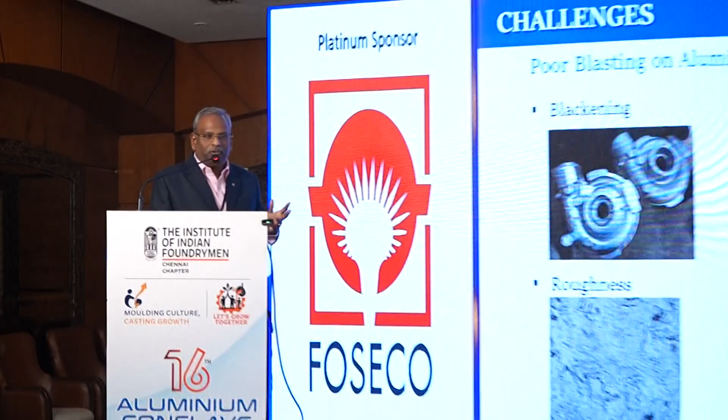So these are all the challenges you will always be seeing in aluminum die casting due to poor blasting: blackening of the component, staining, shots embedded on the component, and roughness. This is what you will always have a problem with at the end of the month before dispatch. So we will be giving you a proper solution for it. That means we need to have a proper surface preparation.

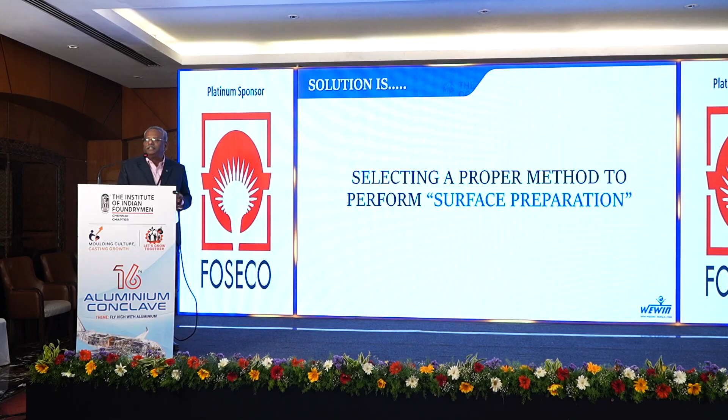See, the topic was given as tradition and innovation. These are a few key points I want to tell you, and it is not a big elaborated subject of shot blasting, which everybody knows. But whenever you need to go for any shot blasting requirement, at least you have to understand what you want from the supplier and what procedure is required, for which these small inputs are for you.

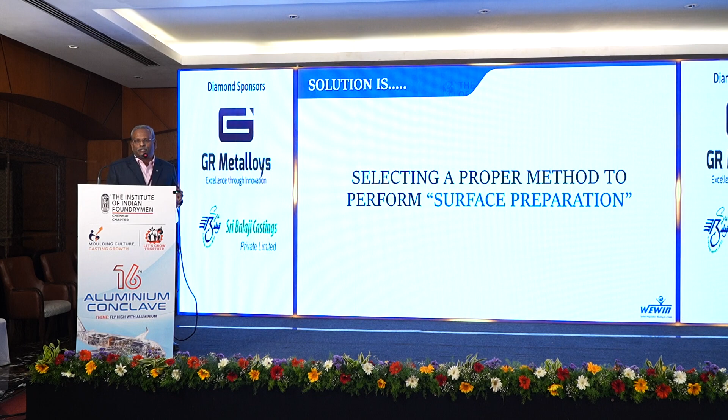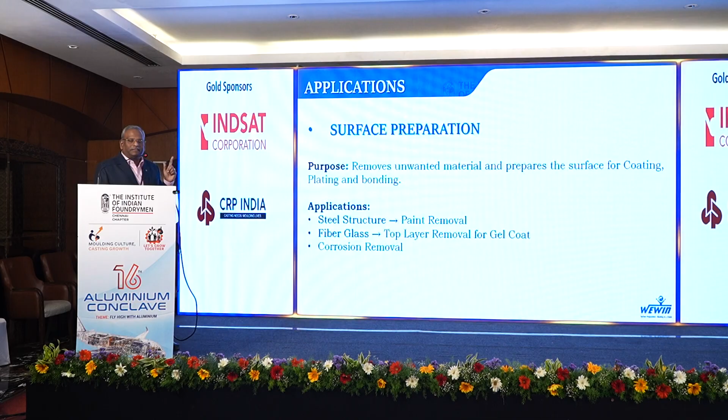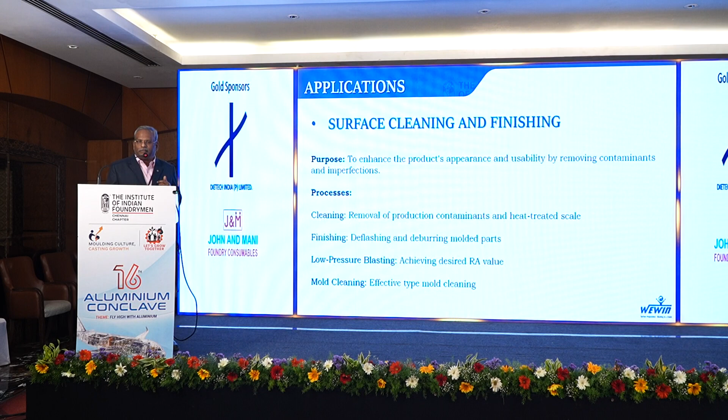Always look at what application you are looking for. In shot blasting there will always be three applications: one is surface preparation, second is surface cleaning and finishing, and the third one is shot peening. Surface preparation is nothing but preparing the component before coating or painting. And surface finishing is exactly what is required for aluminum die casting, because after blasting, the component goes for machining or other operations, for which we need to prepare the casting properly.

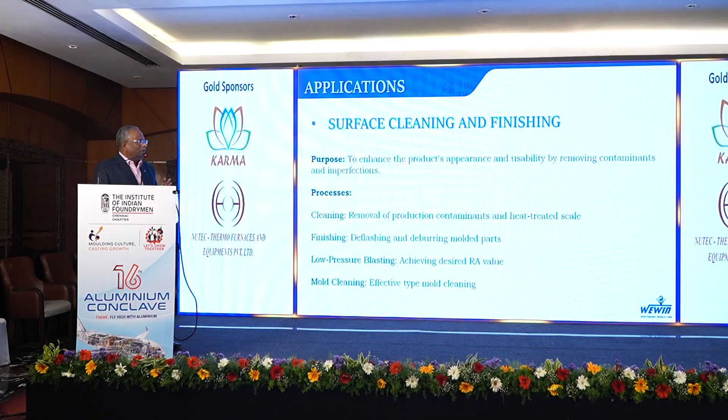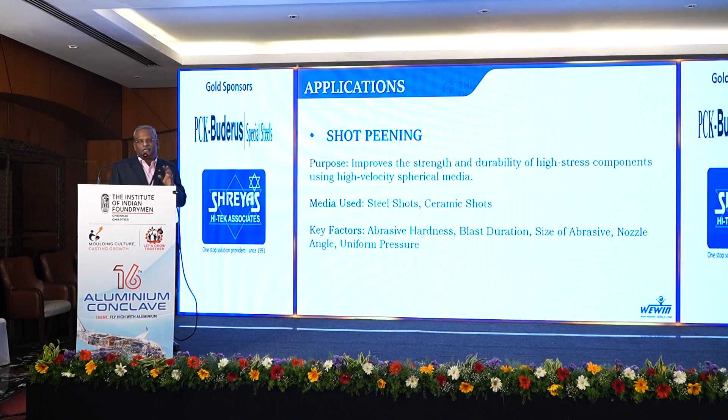So you need to tell the people that you want the machine for surface finishing and cleaning. And the third one is shot peening, which may not be required right now in aluminum die castings. For other parts where cyclic stresses are there, we need to go for shot peening. That is another process. These three are always there for shot blasting.

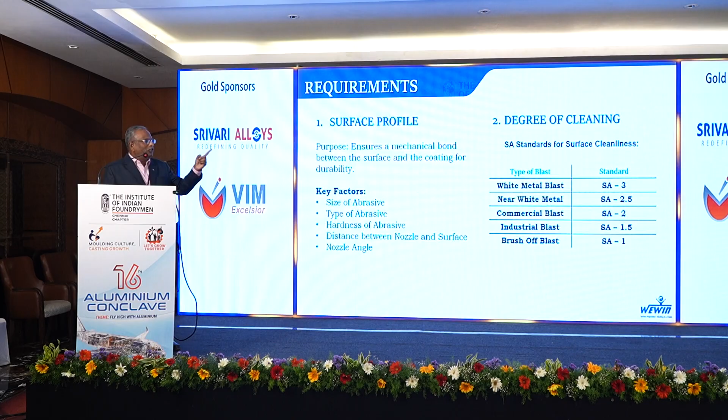Now I have told you what application is required. Second is what your requirement is. Whenever you are asking any shot blasting manufacturer, sir, I am having this casting, I want two things: one is surface profile, another one is degree of cleanliness. Please, I am requesting everybody to give this information so that they will give the right machinery to you and the right shots can be recommended.

Surface profiles will always be in microns. The Ra value or Rz value, what micron you require on the component, that you need to specify. Based on that, the machinery can be manufactured by the people. Second, it's a finish, a visual finish. You want to have roughness or you want less roughness, everything.

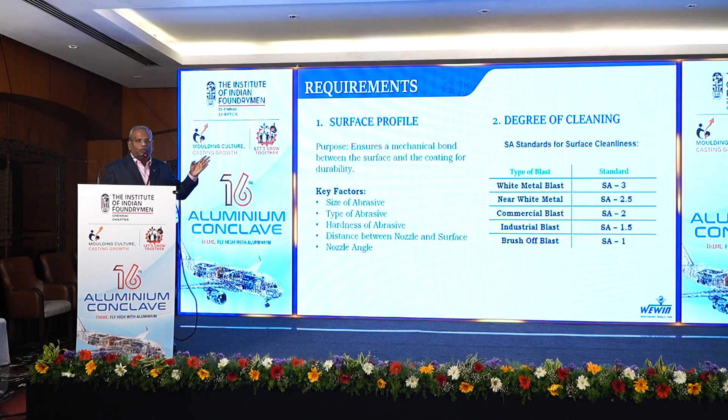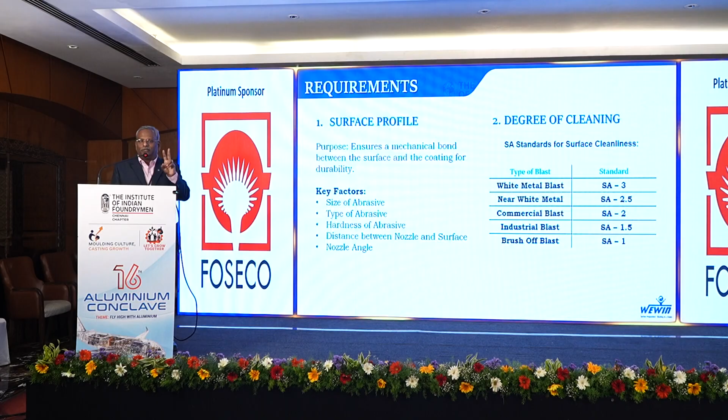So, Prem, I need to have a blasting machine to blast our engine blocks, which requires this much micron roughness, and it should have this much cleanliness. Always you need to mention the two things: what the application is and what the requirement is. These two are always deliverables for any of the equipment manufacturers. This I wanted to highlight to you.

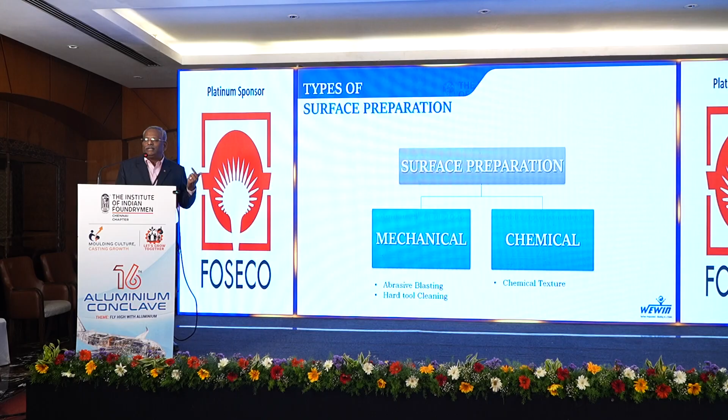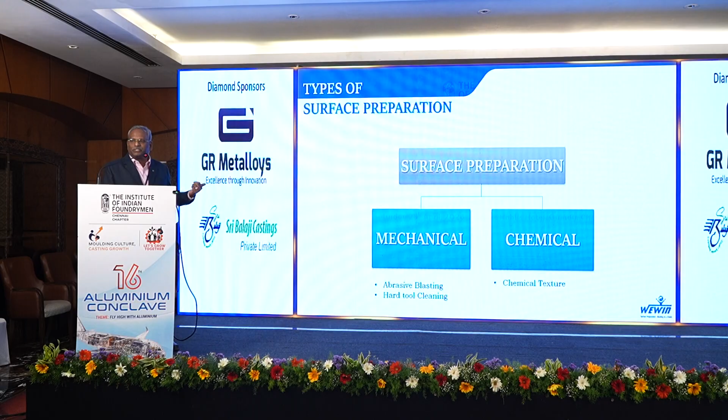Just we are going to the basics, fundamentals. Surface preparation will be of two types, mechanical and chemical. All the people know that after aluminum die casting, people will go for chromatizing, anodizing, everything. That is a chemical process. We will go for the mechanical process, which is abrasive blasting. I will focus on mechanical blasting right now. You can see how many mechanical blastings are available: water jet blasting, ice blasting, laser blasting.

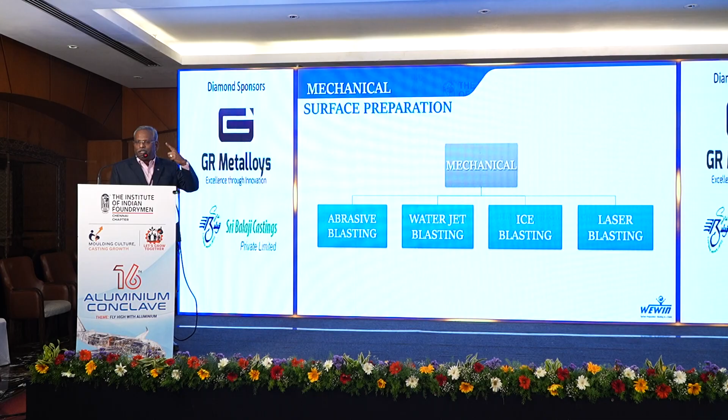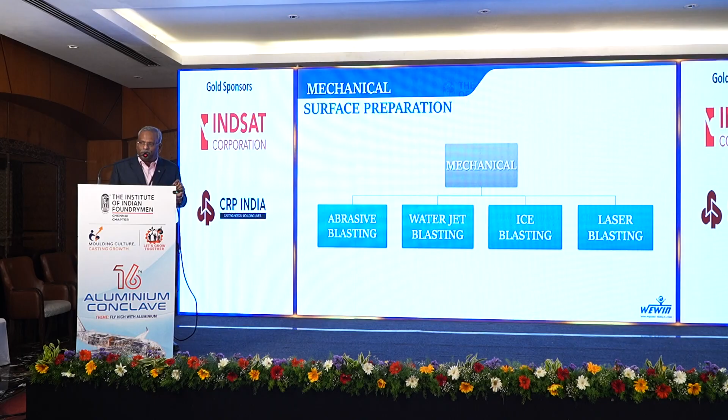Now we need to start from 1880 to 2026, the travel of shot blasting. It started from abrasive blasting. So many managing directors right now are talking about sand blasting, sand blasting. Please prohibit the word sand blasting. It is abrasive blasting. Sand is the most prohibited process in the world. So it's abrasive blasting. Now we have gone on with other advantages.

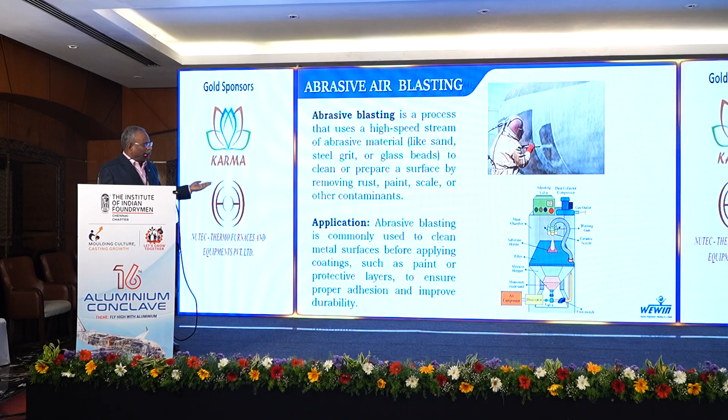Just for the pictorial view, I am giving you information about abrasive blasting. It's like compressed air blasting, which you people always have in mind from college days as sand blasting. The abrasive is mixed with air pressure and blasted, for which you can use sand, steel grit, glass bead, anything, through which you will get proper surface preparation.

Then it goes to wheel blasting. Compressed air blasting is called air blasting. Wheel blasting is called automated blasting. Most of our aluminum die casting people will have automated shot blasting, which is a wheel type shot blasting machine. You can see there will be a turbine propelling the shots at different speeds. We will be cleaning with that.

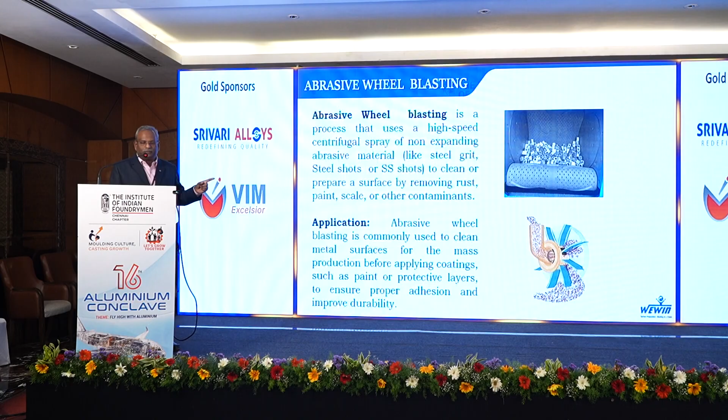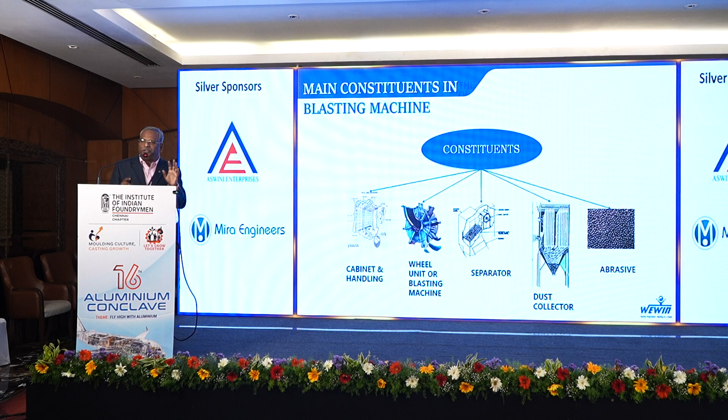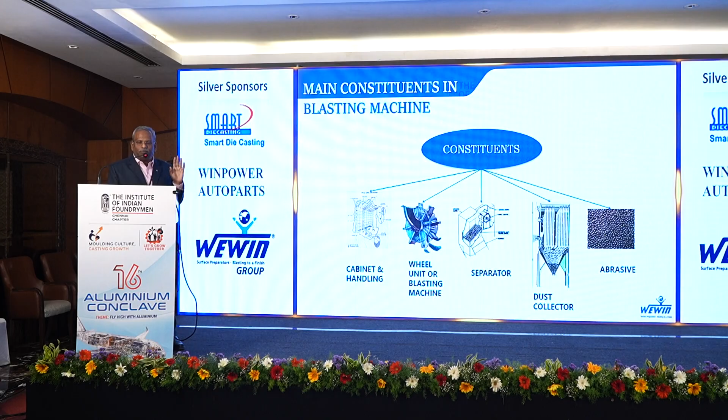Now these two small slides can be understood even at CEO level or the lower level. People can understand about the shot blasting machine. If you give 20 marks for each, it will become 100%. Whenever you are walking through your shop, if you see that anything is not working, that means your system is not working properly. Now these 5 systems I will correlate with our human body. Next slide.

I think now you can understand easily. This is not only our shot blasting; any shot blasting in the world, you can understand this. Always you can see the body. Every maintenance person, when there is a problem in the machine, will be doing all the patch-up work. That is called body and handling. And every maintenance person understands wheel unit maintenance.

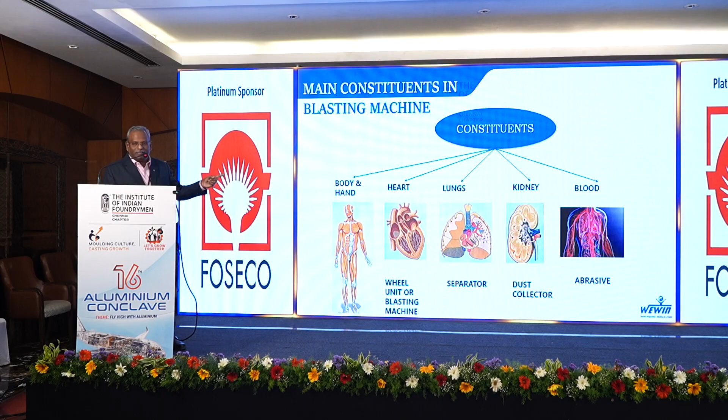Lungs is the separation system. Kidney is the dust collector. Abrasive is the blood. You know one thing, we don't know whether the kidney is working or not, but when we have chest pain, immediately we attend. That's how all companies replace the blade, impeller, control cage immediately. When we have scratches on our hand, immediately we put a band-aid. We maintain it. Whereas nobody knows whether the kidney is working or not.

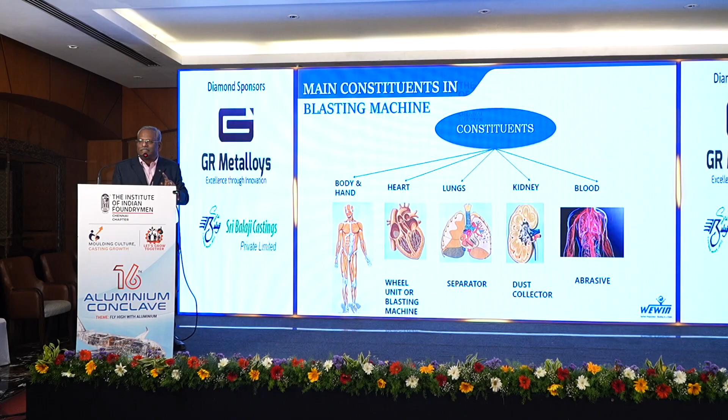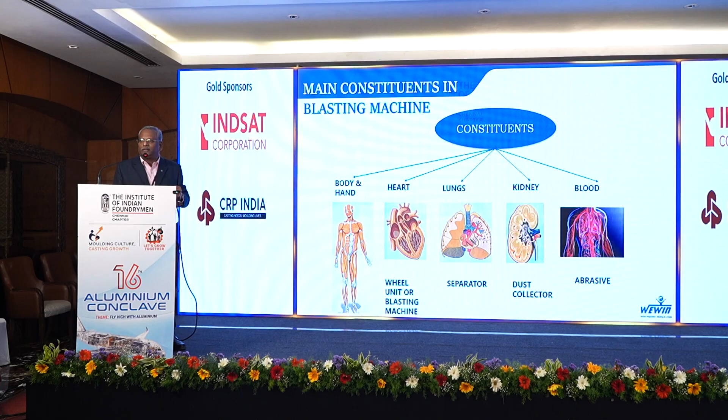That's how most machine failures take place in the kidney, the dust collection system. This is always outside the plant and nobody sees how it is working, whether it is sucking properly or not. Why? Because we are not running the machine. It is given to the subcontractor. This is where the failure takes place. So it's a small idea, you can correlate.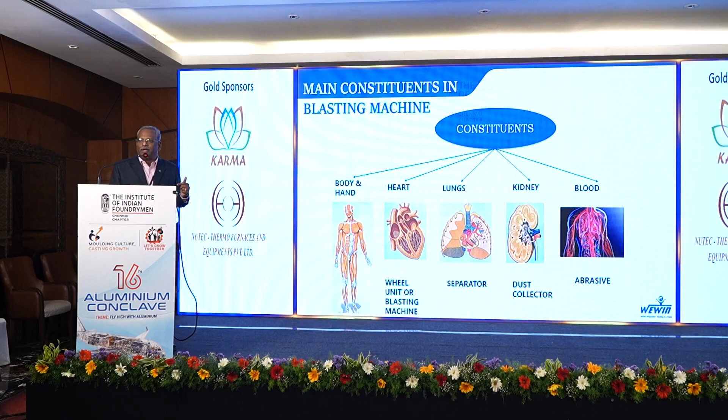If you are not using a proper abrasive, definitely there will be a failure in your product. If you are using grit, it will affect the surface roughness. If you are using any other abrasive, the cleaning will never be there. So the blood of the machine is abrasive. Go back and check in your machine which size of abrasive you are using for which product, what surface roughness is asked by the people, and what we are using.

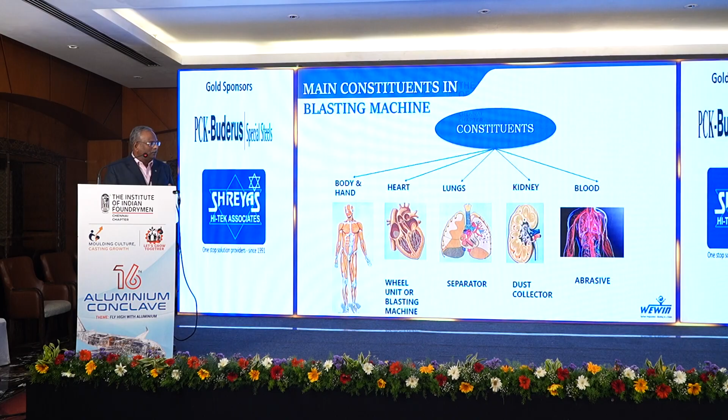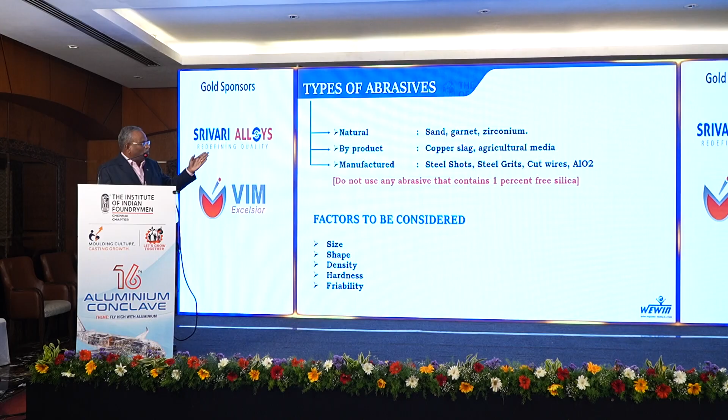So these are all the abrasives which you may be knowing about. I am just covering this simply. You can see these are natural products: sand, garnet and zirconium. Byproducts are copper slag and agricultural media, because most aluminum die casting people will go for copper slag and agricultural media. Manufactured ones will be steel shot, steel grit, cut wire.

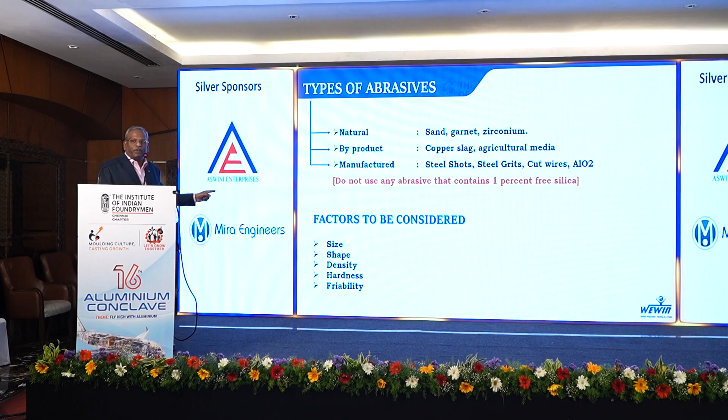Now you can see the factors to be considered: the size, shape, density, hardness, friability. Tell your quality people whenever they are purchasing the abrasives to at least check them, because this is a consumable. Now we are all talking about less margin, EBITDA, everything, right? Where are we spending money? You check this; consumables you can control.

This is the next generation, may not be workable for our aluminum die casting. For your knowledge, I am telling you. For the oil and gas industry, water jet blasting is being used.

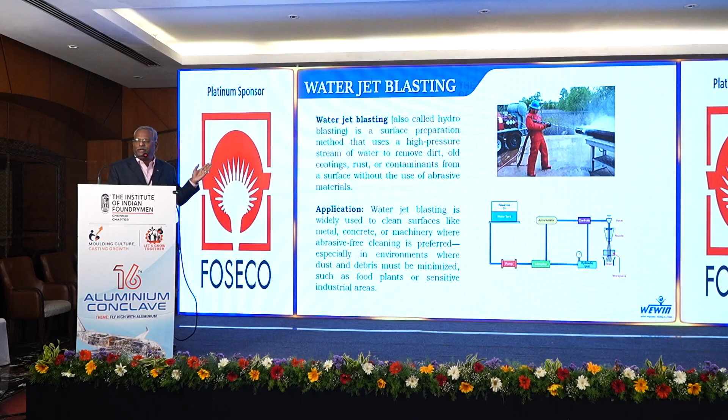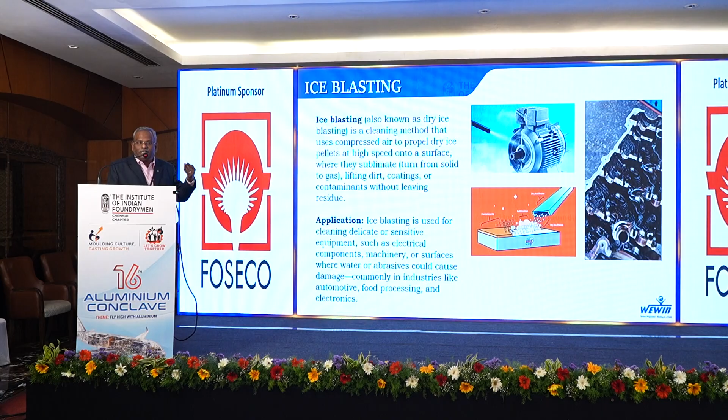So ice blasting, for very big mold cleaning purposes, people are using it. The ice pellets, small ice, will become proper balls. We will be using them for the cleaning. Here the advantage is the surface will never get affected. Even the roughness will never get affected. Only the dirt will be taken out. So that is ice blasting.

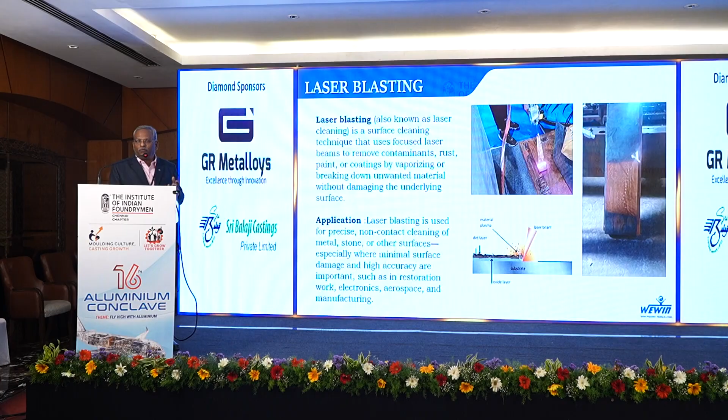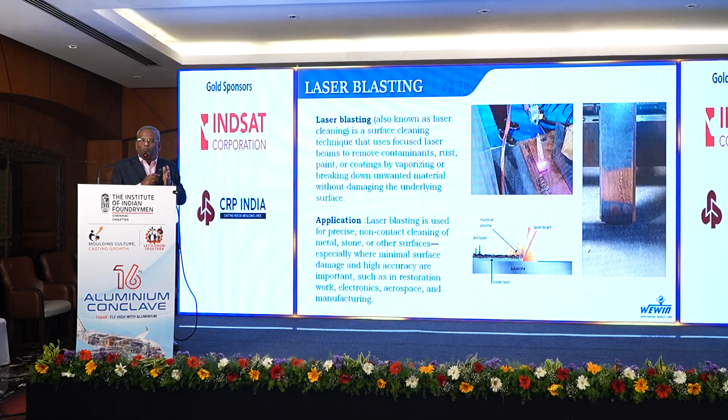Now this is very latest: laser blasting. You can have this like CNC machines. We don't require any abrasives, we don't require anything, we can clean it as it is. Now people are willing to go for laser blasting for so many other purposes. We are mainly looking at it for mold cleaning. In rubber mold or injection mold cleaning, after a certain number of cycles, the mold will get blackened. To remove it, when we use abrasive sand, it will get damaged, for which the laser is used. So this is the latest version.

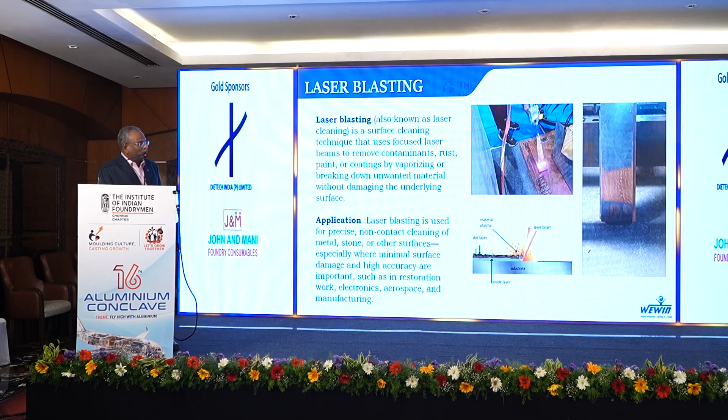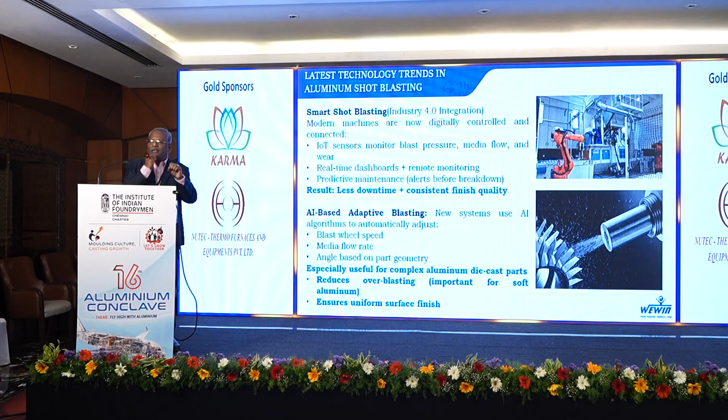So people are going for Industry 4.0. Now traditionally, the same things are there. Shot blasting with compressed air and abrasive is one blasting. Abrasive with the turbine will be another blasting. This is the same. Where have we come up? This is what, whether it is there in your machine or not.

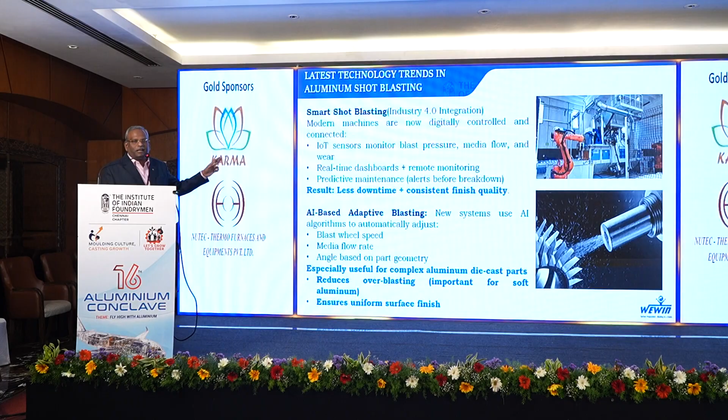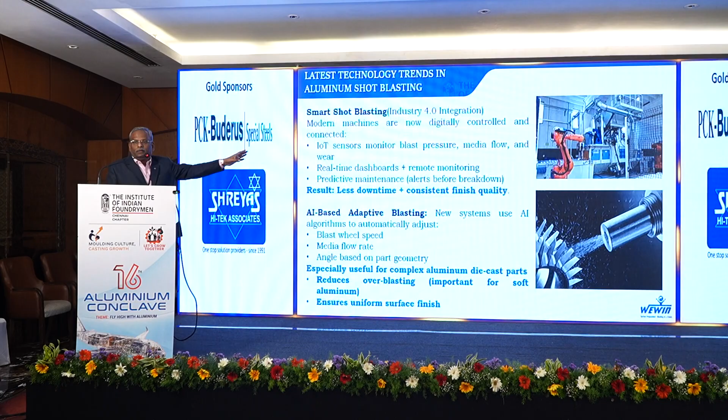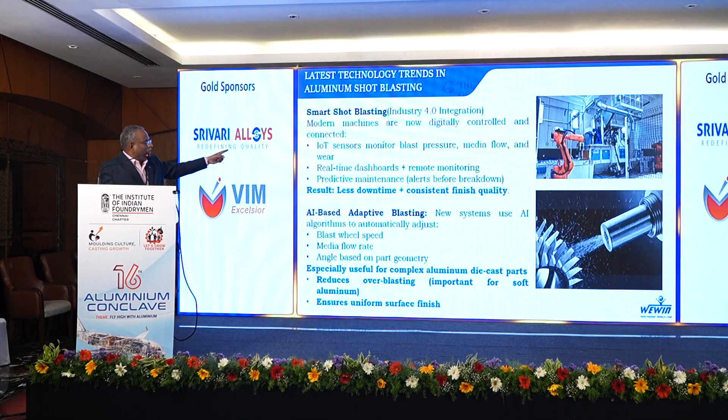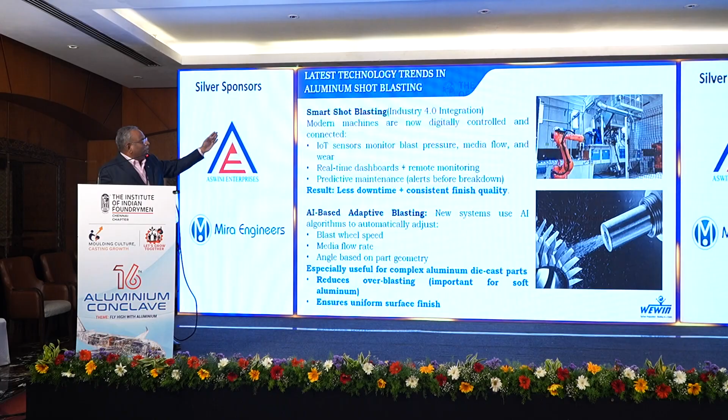See, that's what I am telling you. All these things can be incorporated for Industry 4.0. When the shot blasting machine rate is 20 lakhs, please spend another 5 lakhs for this automation, which will give you the best life. That is a development. Now I have told you this development is for up to 2026.

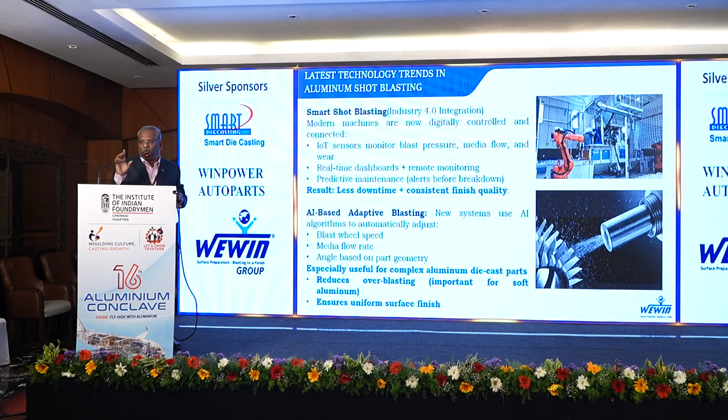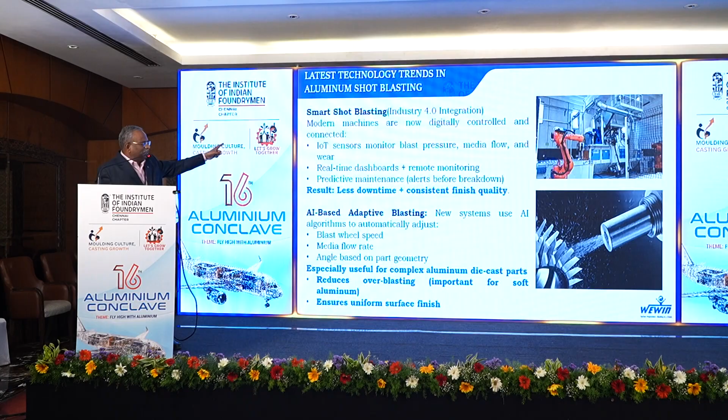Recently Hitachi Energy got a machine in Bangalore; that is a company with an unmanned shop floor, unmanned. Robots will do everything. Blasting, painting, curing, everything will take place. It is only because of this kind of latest technology involved in the control panels.

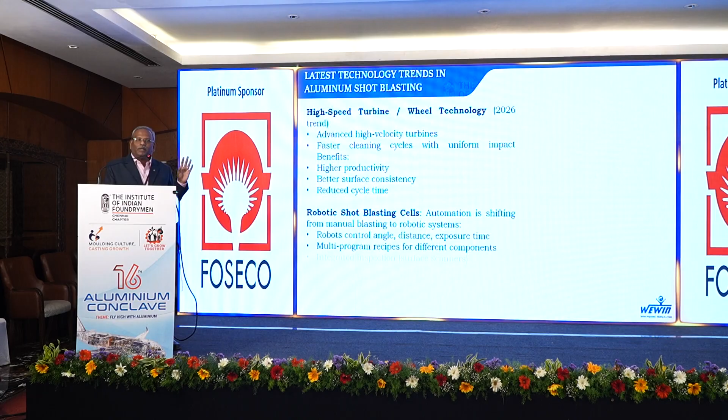Now people will be very clear on shot blasting machines. Wheel unit is there, okay sir. Separation is there, okay sir. But at how much speed is it running? Whether the balls are hitting the right part, whether this VFD is required, this particular velocity is required, this much flow rate is required. So these are all the things to be monitored. That is the next level of our technology. High productivity and better surface consistency, everything you can get.

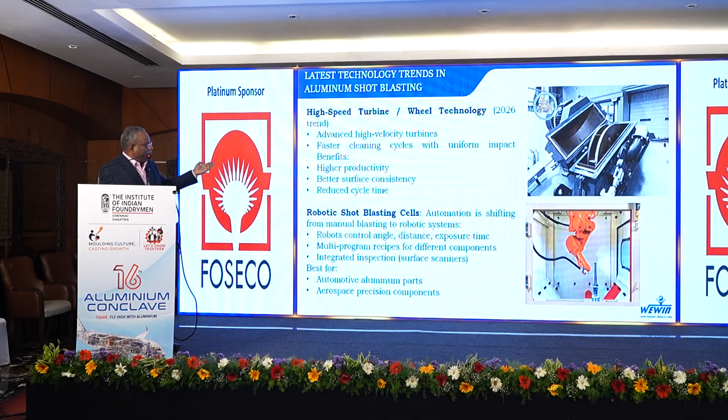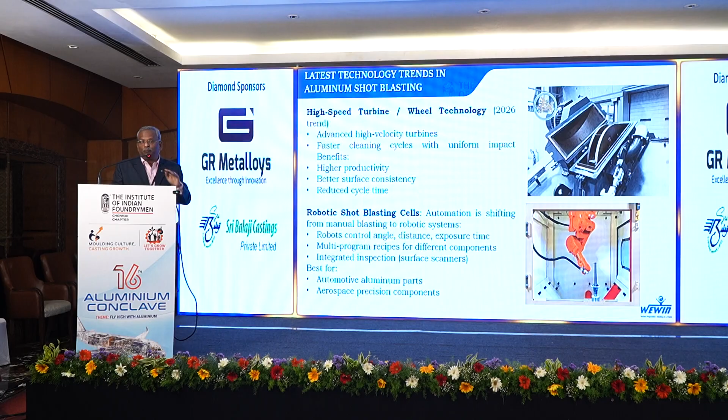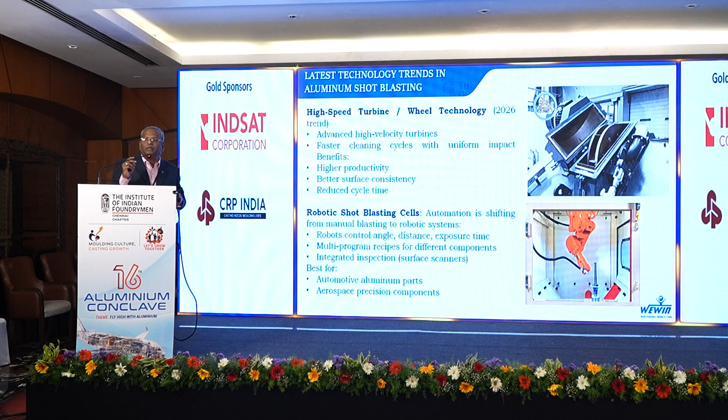Everybody knows shot blasting, but whether the shot blasting will have automation, whether it will give us a message? Now we proudly say that in JSW Salem we supplied a machine for 70 meters per minute. The rod will blast and go. This is a machine we supplied. We struggled for 2 years. Now the machine is controlled from our factory.

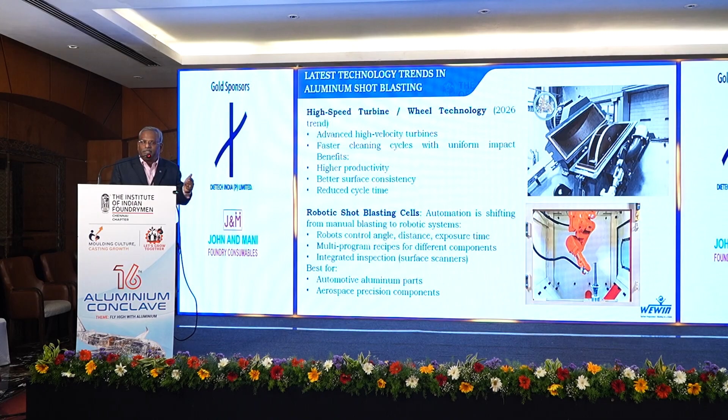My boys will say, sir, the impeller change poirukku, control gauge poidichu, screw conveyor jam avapodhu. Everything is controlled from our factory. It is only because of IoT systems. That's what I am requesting you people. A blasting machine anybody can give, no problem, because it's a 100 years old technology.

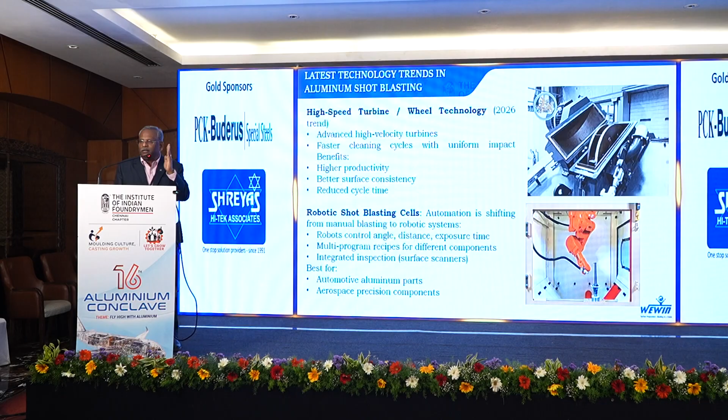The man who can give you a machine that you can control in your mobile apps to say, yeah, this machine has run for 300 blasting hours, 3000 blasting hours. Now this is the time to replace the blade, impeller, control gauge. Now this is the time we need to replace the dust collector. You know, aluminum powder is the most dangerous fuel for a bomb. If you are not maintaining your dust collector properly, what will happen? You will get blasted. Those informations will come to our mobile. That is the next technology.

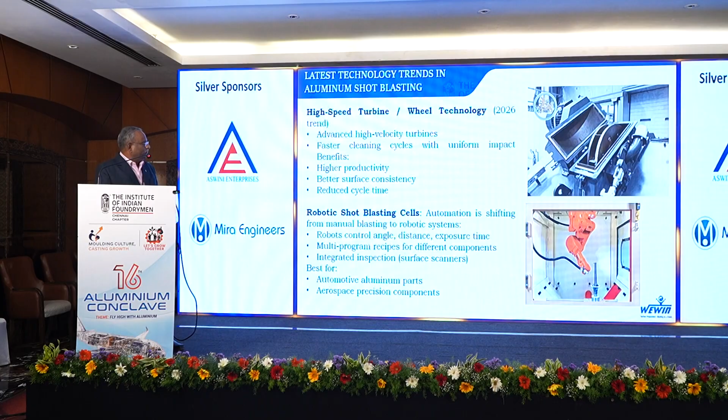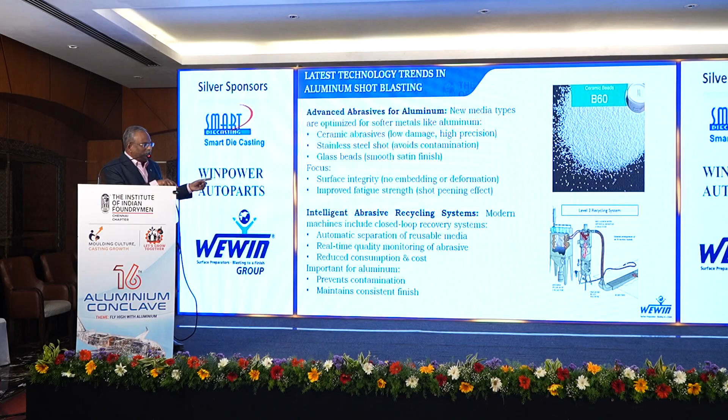So these are all the abrasives. Not only steel shots, we can go with ceramic abrasives also. See, the abrasive recycling systems and separation system which I have given to you. Now everywhere, when people are asking for wheel units, we need to have a variable frequency drive. Dust collection blower, we need to have a variable frequency drive. In all usage, the wall thickness of the casting will differ. Based on that, we need to run the wheel unit at a different speed. Everything to be incorporated. Eco-friendly dust collection systems are also required.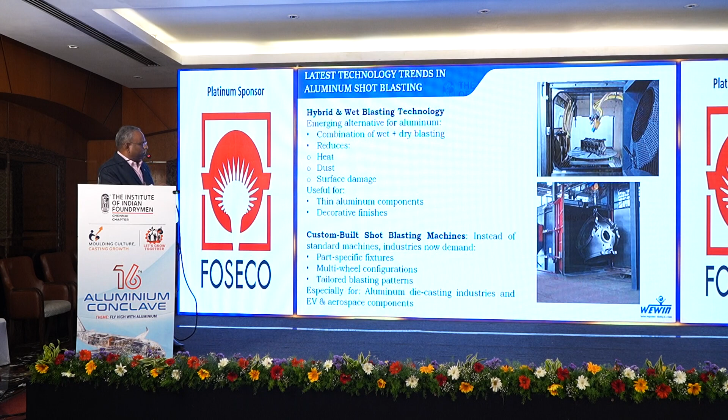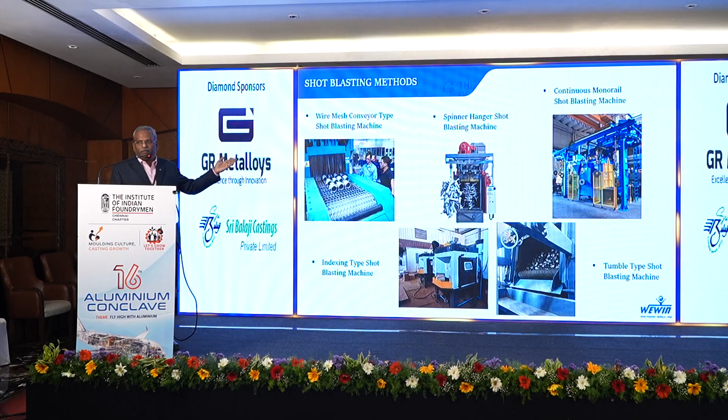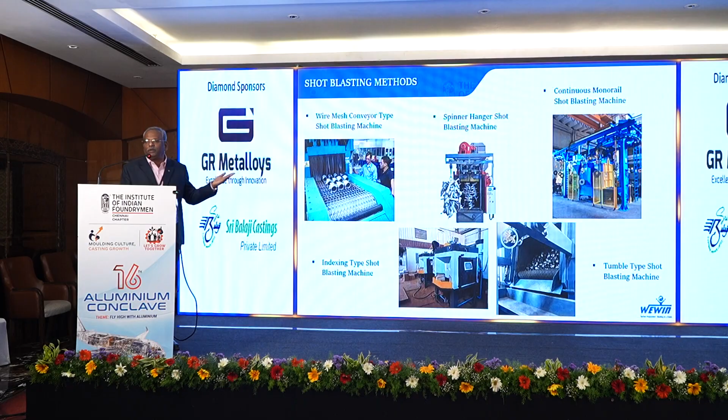So now it has come, and we are going to give a wet collector for shot blasting. We are checking it recently, we will tell you. So these are different models of machines. Recently we got success with aluminum die casting, this mesh conveyor shot blasting machine, and I think everybody knows the spinner hanger shot blasting machines. You can go for the conveyorized monorail where continuous blasting will be taking place, and indexing machines and tumble blast machines. Usually in our industry in Chennai, tumble blast and spinner hangers are more available. Now people are asking for mesh conveyor shot blasting machines.

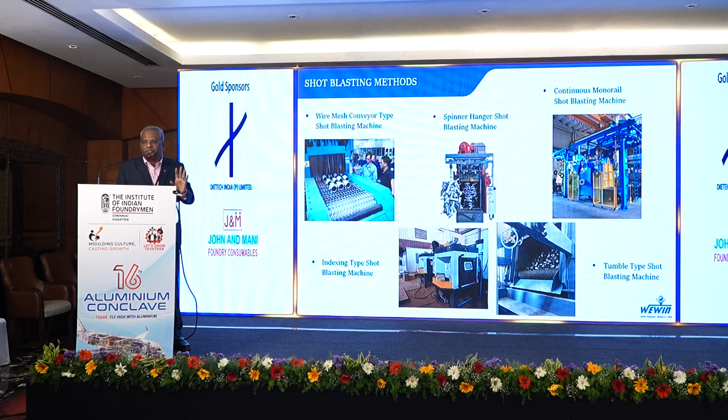For one company with 17,000 two-wheeler alloy wheels per day production, we have given a machine. It was a big challenge for us. Within 3 to 4 months it was organized, supplied, and we got repeat orders of 6. Why I am telling you now, manpower is an issue for us. Now robots are available in China in a very cheap way. Pick and place robot, finish. You just keep this machine, you keep the component, it will get blasted, it will come out, finish. And anyhow, Sakti has told that the inspection mechanism is available, you can inspect it and send it. Technologies are available, we need to think how to go ahead.

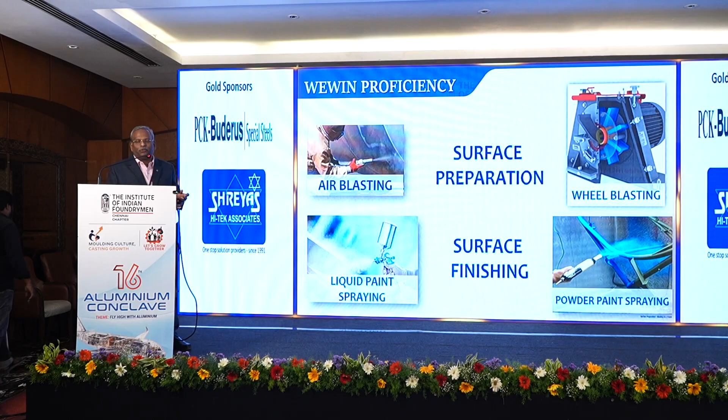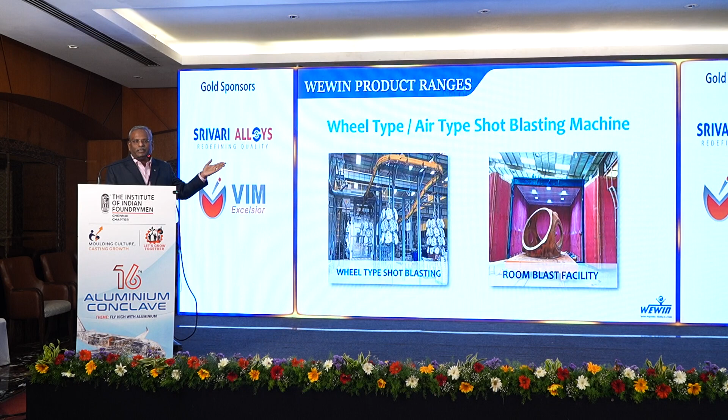So just we are telling about Wewin. Wewin will have only 2. We are into surface preparation and finishing: air blasting and wheel blasting, painting and powder coating. This is our proficiency. So these are all the machines which we have given. That is an air type shot blasting machine for the windmill industry, and this is a spinner hanger shot blasting machine for aluminum die castings. After aluminum die castings, you can have powder coating plants, which are also our projects.

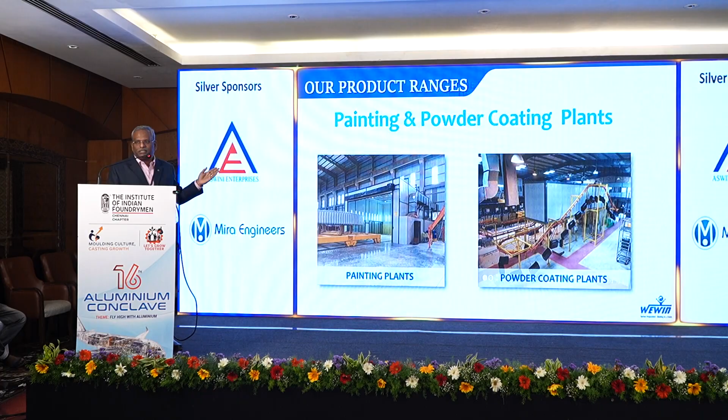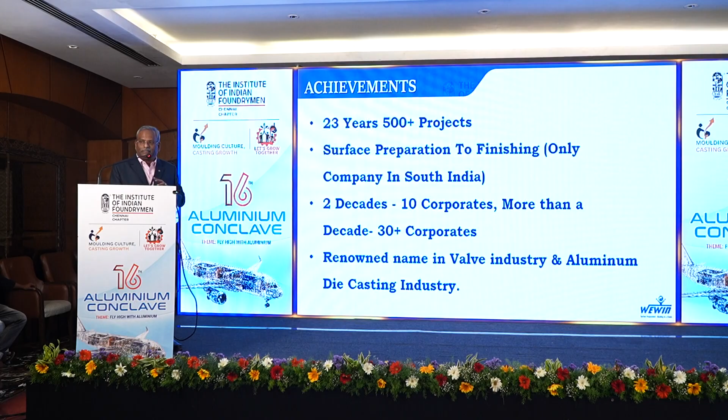So why Wewin? This is our credibility. In 23 years we have done 500 projects, small and big, and we proudly say that we are the one and only company in South India for blasting to finishing. Nobody else is there. Over 2 decades, 10 corporates, all big companies, will be having our machines. And in the past 10 years, about 30 other corporates are with us, renowned names in the valve industry and aluminum industry. In aluminum industries, Sundaram Clayton, Rockman, or anybody, they will have our machines. And we have good after sales service and the best ROI on our machines.